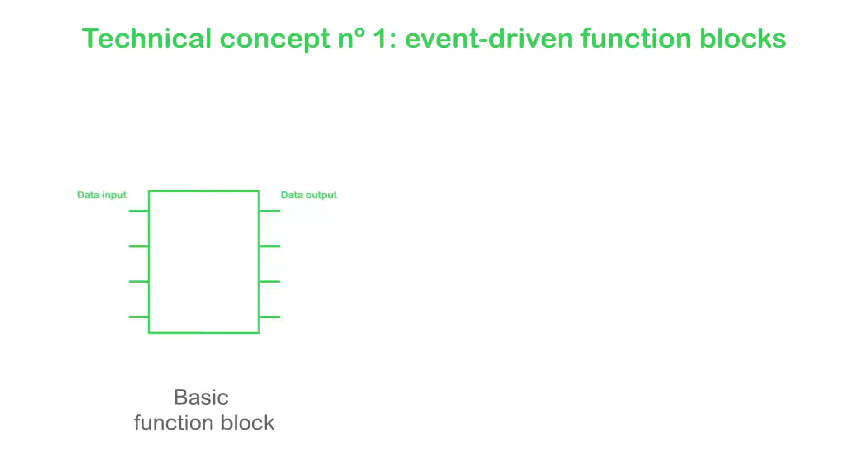Technical concept number 1, event-driven function blocks. The authors of the standard took the well-known IEC 61131 function block concept with its data inputs and data outputs, and they added event inputs and event outputs to it. The behavior of a basic function block is defined as an event-driven state machine, the so-called execution control chart.

When a transition is fired, the active state of the execution control chart changes with only one active state at any one time. When a new state is entered, the corresponding actions are executed. An action consists of an algorithm or an output event, or both. An algorithm within a basic function block can be written in any programming language. The IEC 61499 standard doesn't actually specify the programming language, but it does recommend the IEC 61131-3 languages.

An algorithm can only use input data, output data, and internal data of the function block type. Therefore, a basic function block defines very strong encapsulation of algorithms, which is a key characteristic of software components. Applications are built by linking function blocks together into function block networks. And I can nest function block networks within function blocks with, in theory, no limit.

Using the event inputs and outputs, I can control the execution order of the function block. By linking event outputs and data outputs to event inputs and data inputs, I effectively have very precise control of the execution order and data flow of an application. Right, now, you might be thinking, hey, so what? What's the big deal? So let me assure you that this apparently simple construct of event-driven function blocks is actually a very powerful thing indeed.

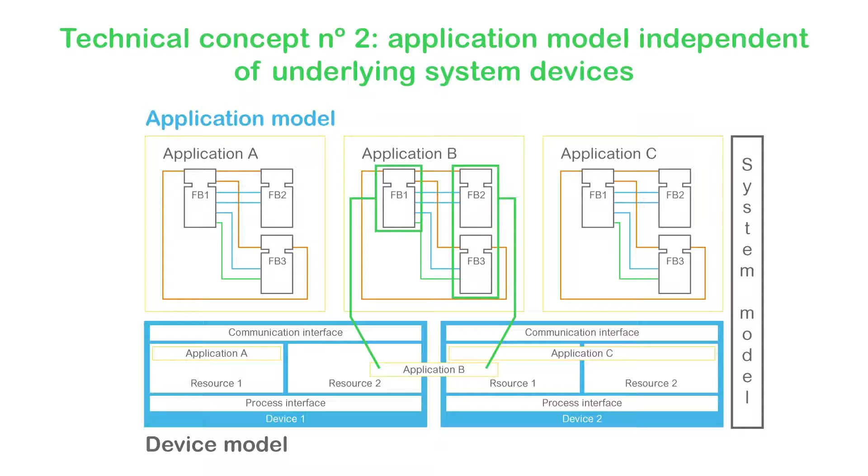Application programming is done independently of the underlying control devices and communications infrastructure topology, which is defined by the system model. The system model maps and distributes one or more applications by defining which parts of the application are executed on which devices.

Amongst other things, a device model manages the connection to the process interface, sensors or actuators via the device I/O bus, and to the communications interface to other devices or IT systems used by the distributed application. The combination of application, system, and device models enables applications to be designed independently of the underlying automation hardware.

Once completed, the applications can be distributed across heterogeneous devices with zero programming effort, and those devices can then interoperate following standardized communication data models across networks, again, all without the need for programming. The devices I distribute the application to could be instruments or actuators, like variable speed drives. They could be small or large PLCs, or edge computing devices, like this device here. I can even distribute applications to small devices, like Raspberry Pis.

Pretty cool, huh? But let's pause a second here and consider what we've discussed so far. Event-driven software components, independent of the underlying hardware devices, that can be distributed across different hardware devices, ranging from instruments and actuators to controllers to full-blown multi-core edge computers. I hope you're starting to get the picture. This is not business as usual for the automation world.

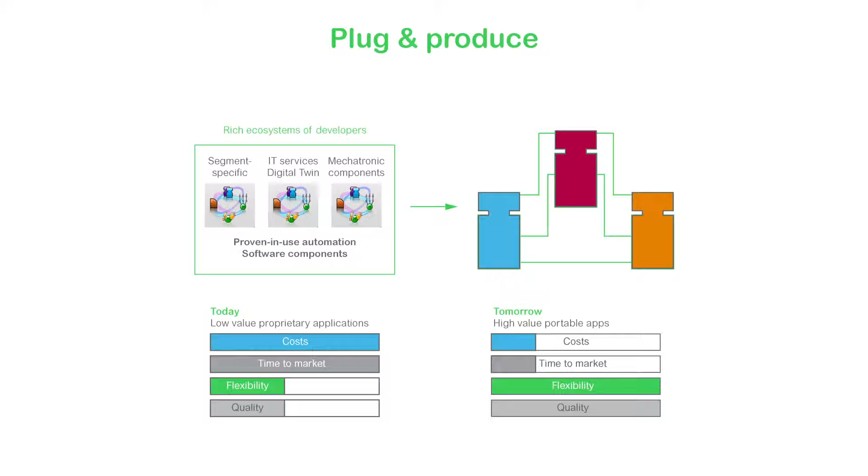In fact, I have just described a future world where instead of programming controllers, I solve complex Industry 4.0 use cases with a plug-and-produce approach, where I plug together proven-in-use components that I download from a rich ecosystem of smart developers to create a final application. Not only do I drastically reduce the cost of creating an application and increase its quality, but I can also now tackle complex Industry 4.0 use cases that were impossible or too expensive to tackle using classical PLC programming techniques.

Anyway, enough theory. Let's talk to some people that are actually doing this today. Let me first hand over to Franco Cavadini, who will talk about how he has solved some of those cool Industry 4.0 use cases like digital twins and virtual commissioning using the IEC 61499 standard. Franco, over to you. Hi John, and thank you for your introduction. I honestly hope that my experience as a practitioner of IEC 61499 will be of interest for our audience.

Now, today I'd like to focus on one aspect that you actually mentioned during your speech, which is the need for operation technology and information technology to integrate seamlessly in the future of automation. You know very well that I started working with 61499 a few years ago, especially applying it within the most advanced international R&D projects. One of its technical features that immediately won me over is the way the standard merges the requirements of real-time control with the event-based nature of IT applications.

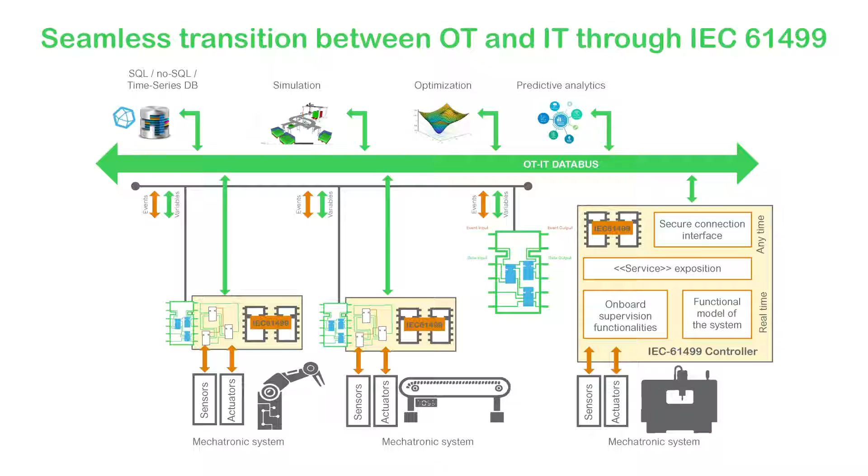In fact, well before the Industry 4.0 initiative was launched, we were already implementing so-called new layers of intelligence to extend the functionalities of automation systems beyond their physical boundaries. Now, my idea is that the PLC must evolve to become the point of convergence between physical and digital. And I think that IEC 61499 is in the perfect position to be the key technological enabler of such a transition. But since you actually invited me to talk about use cases and not just about theory, let me try to provide you a few interesting examples of what we have been doing recently.

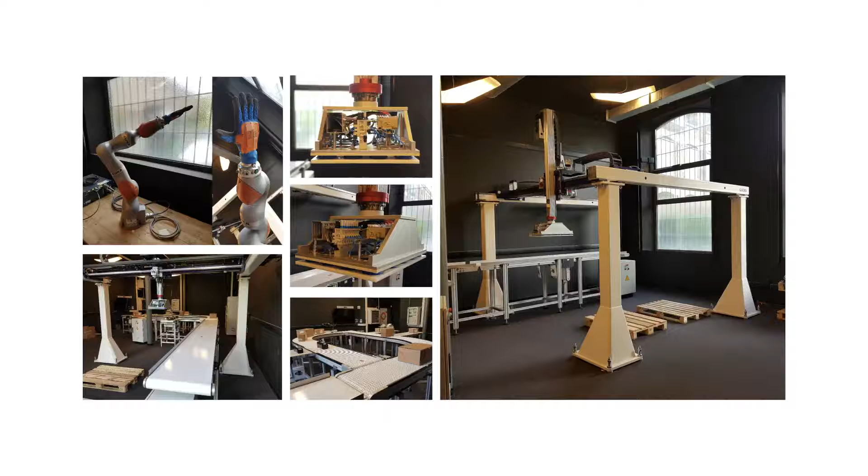Now, I'd like to start with one of the results that I am honestly most proud of, the distributed automation demonstrator that we have realized at the Como Next Innovation Hub. It is located here in Italy, in the northern part of it actually, near the Lake of Como, and it was done thanks to the Horizon 2020 program of the European Commission, under the so-called Daedalus project. Our idea at the beginning was to build a system capable of showcasing all the strengths and the potential of IEC 61499, but in an industrial-grade scenario.

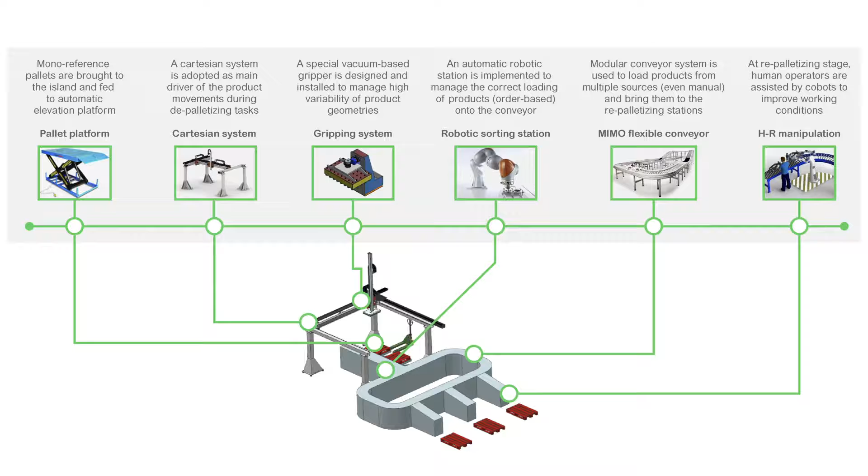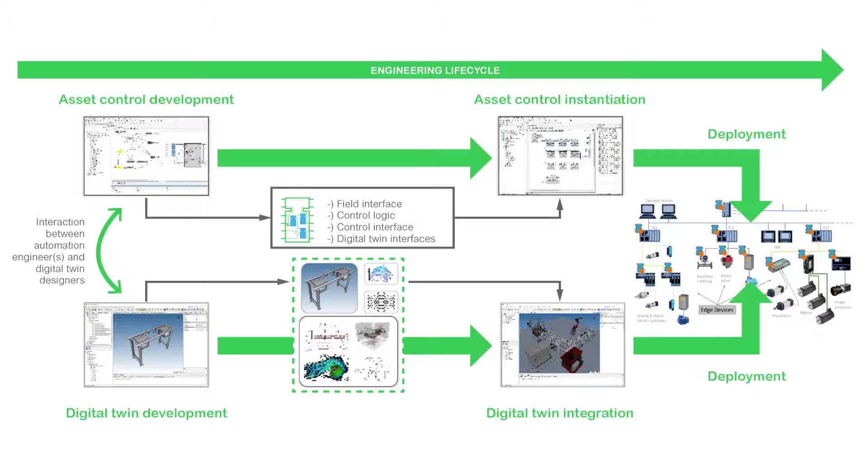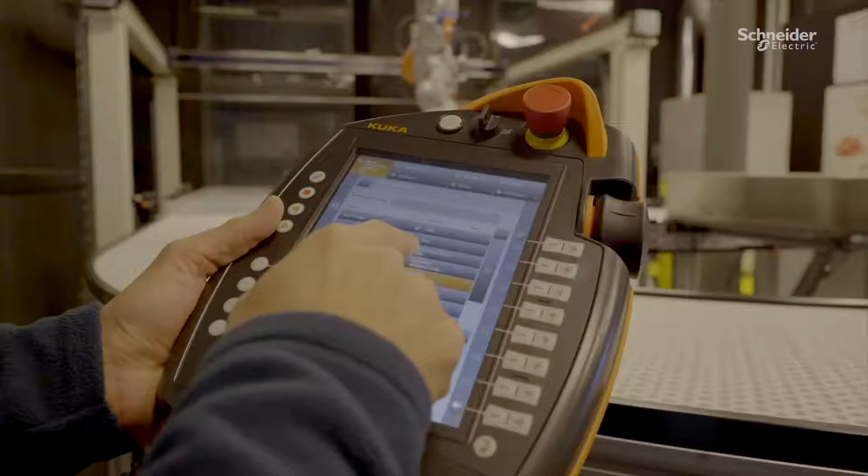Through the support of several international companies, we have integrated heterogeneous systems from multiple suppliers and made them work in orchestration, thanks to 61499. One aspect in particular I'd like to focus on is the way that we have exploited the event-based and object-oriented nature of the standard to implement the so-called virtual commissioning. In fact, we have extended the design lifecycle of automation to include also digital twins of physical assets. This enables the concurrent engineering of control and simulation, empowering developers with new and powerful tools to debug their code faster and better. This innovative approach has been validated through our demonstrator, and you can actually come and see it at any time at the Como Next Innovation Hub.

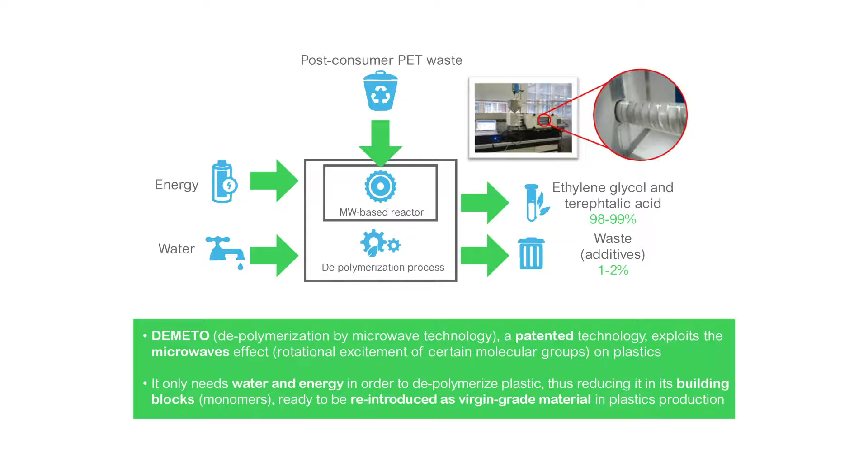The second example I'd like to talk about today is from a completely different sector, but I think that it will be equally interesting. I'm talking here about the process industry. In fact, as part of a project called DEMETO, we are realizing a pilot plant for chemical recycling of plastics, also called depolymerization. And the platform we use to develop its automation is obviously based on IEC 61499. Now, from a control point of view, we chose 61499 because of the high modularity of the core reactor of the process. But there is another aspect which is and was fundamental to us, the runtime adaptation of the plant working parameters.

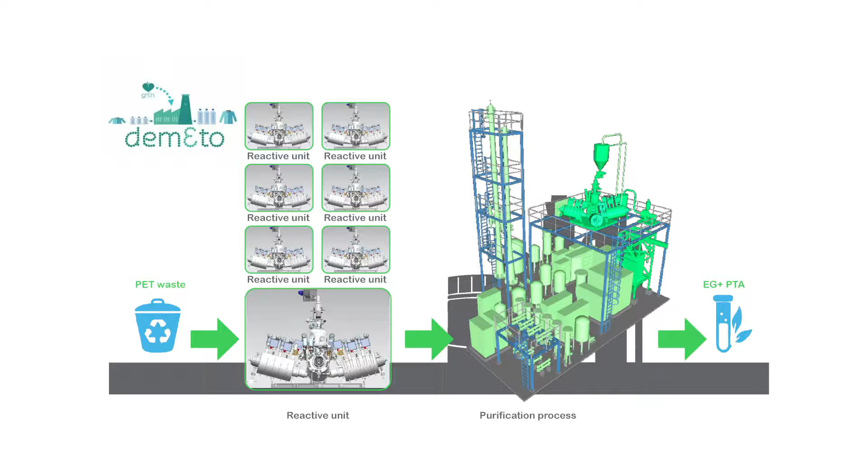Let me explain a bit better the context. When you deal with recycling as we do, it means that your feedstock is actually a post-consumer waste, hence with the intrinsic variability that is difficult to adapt with traditional control techniques. What we want to do is to continuously optimize the process by adapting its configuration to the variability which is intrinsic to the feedstock and of other boundary conditions. For instance, the live cost of electricity.

Thanks to IEC 61499, it was easy for us to develop real-time control software, but also to connect to external data analysis and optimization tools, actually leveraging on the event-based formalism and interfacing mechanism of the standard to implement it. With the Demeto pilot plant, if you want, we are actually putting together a revolutionary chemical process with a game-changing automation technology. And I'm quite sure that something good will come out from it.

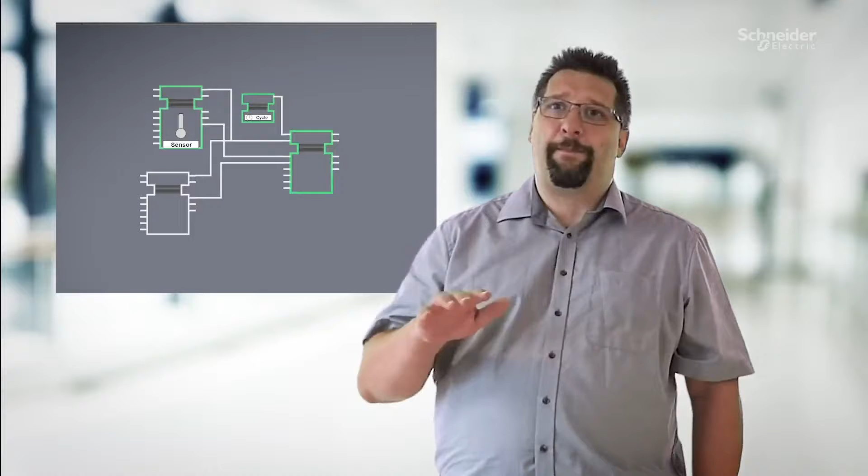However, in automation, we have also the need for periodical and cyclic program execution, especially if any kind of regulatory control is needed. It is easy to achieve this in an IEC 61499 program because I can just use a function block which creates a periodical event in my program logic. This generated event then triggers only that part of my logic which is needed to be calculated in a periodical manner. All the other parts are still only executed in case there is a change of an input value. Based on this paradigm, there is a huge reduction in calculation time needed for a program to run because less code gets executed which will produce the same result over and over since no input data changes at all.

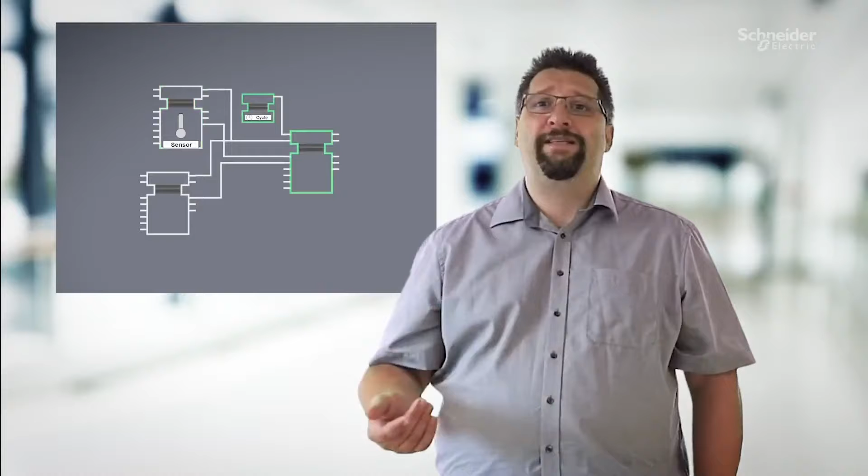Another great benefit of the event-driven execution is that it works in the same manner and in the same way as most of the IT, cloud and web applications do. These kind of programs interact with method calls and notifications. The IEC 61499 standard directly supports this way of interaction because the modeling language perfectly describes the association between data and events and makes it easy to use and understand them thanks to its graphical representation we have in the standard itself.

A method call from the IT level program to an IEC 61499 application can be directly translated as an occurrence of an event and is received with data associated through the so-called WITH construct. Such method calls or notifications with their associated data are unique messages exchanged between the programs. This provides guaranteed data consistency throughout the lifetime of the event execution. Nicely, all of this works inside a single controller in the same way as in a distributed automation environment with multiple controllers involved to solve an automation task.

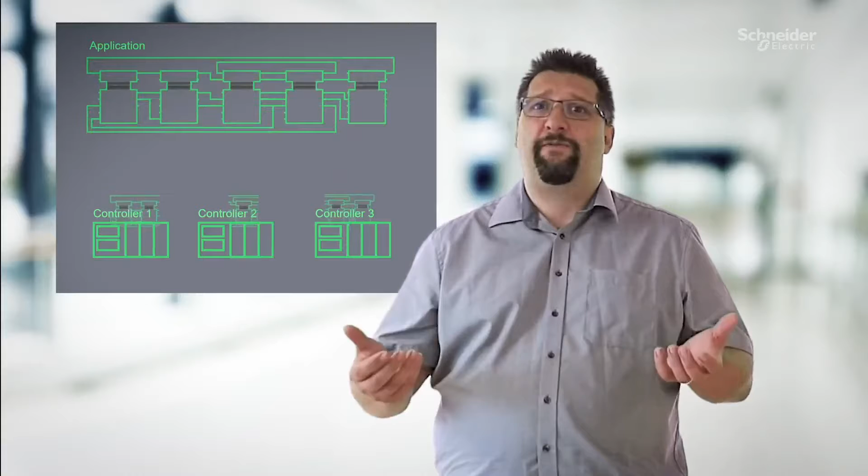All these great capabilities allow me to solve complex automation tasks with ease and less effort is needed for me to make it run in a distributed environment. As a great bonus, I get direct integration paths to web, cloud and IT applications to solve my customer needs in a very professional way. All of this should give you now an idea why I'm so excited about IEC 61499 and the solutions we provide in Schneider Electric. Back to you.

Thank you, Gernot. So I hope this short introduction to IEC 61499 has whet your appetite and made you want to learn a lot more. And believe me, there's a lot more to learn.